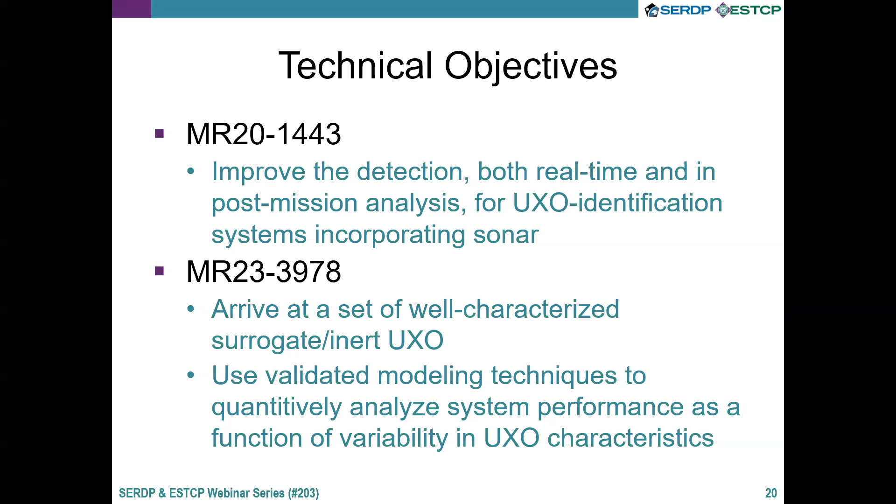And then the second project was a seed effort that kicked off last year, and this is number 3978, whose goal was to arrive at a very well-characterized set of surrogate inert UXO, and then ultimately work towards validating - using validated modeling techniques - to try to analyze how your system would perform as a function of variation in these UXO characteristics.

So both of these were very high level objectives. Both of these projects have several tasks and secondary research goals associated with them. For the focus of this webinar, I want to give you a high level view of how these complement each other.

Essentially the 1443 is going to take a macroscopic view of the key physics associated with the target, and is going to try to distill this complicated problem down to just a few key elements and come up with a way to incorporate these into a classification approach.

On the flip side, project number 3978 is going to actually drill down more microscopically. It's going to really dig into the UXO characteristics themselves and try to learn or make quantitative assessments on how these are going to affect classification.

It's important to have some context for what we're working on here. Both of these projects are aimed at the multi-sensor tow body system that was developed by the Applied Physics Laboratory, the MUST system. Both of these projects are aimed at transitioning knowledge, tools, and simulated data sets to aid in this system.

Just a high level view, it's a MacCartney Focus-3 towfish, and it has a couple of EdgeTech sensors on it. One is the 2205 dual frequency side-scan, and the other is the buried object scanning sonar, the eBOSS.

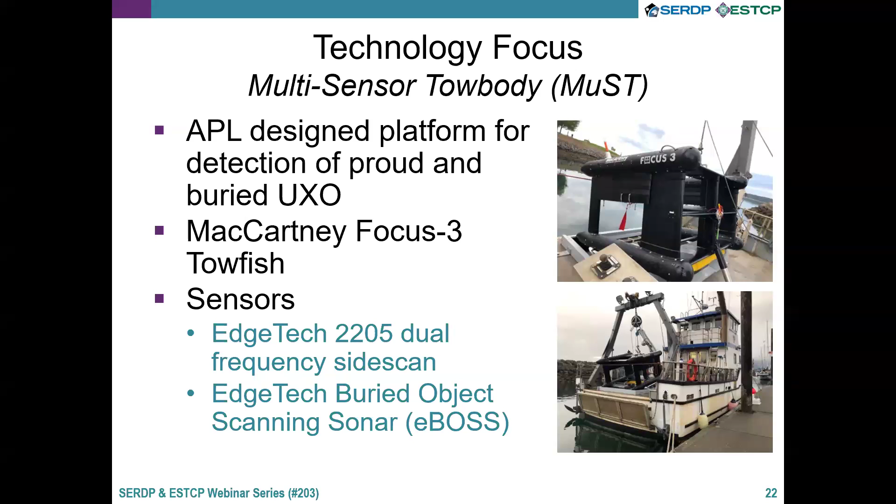There's a lot of information online in final reports and past webinars, but I still wanted to take a little bit of time to show you the example data products that come out of the MUST system.

The MUST system collects 3D volumetric data. Dr. Tim Marston has put a lot of work into developing eBOSS toolkits that give us a lot of flexibility in how we choose to view this data.

For the purposes of these projects, I am focused on looking at two-dimensional maximum intensity projections, so MIPs, of these data, but really I'm going to focus my effort on the acoustic color domain. This is an angle frequency representation of the data, so it really gets at those structural acoustic responses from these objects.

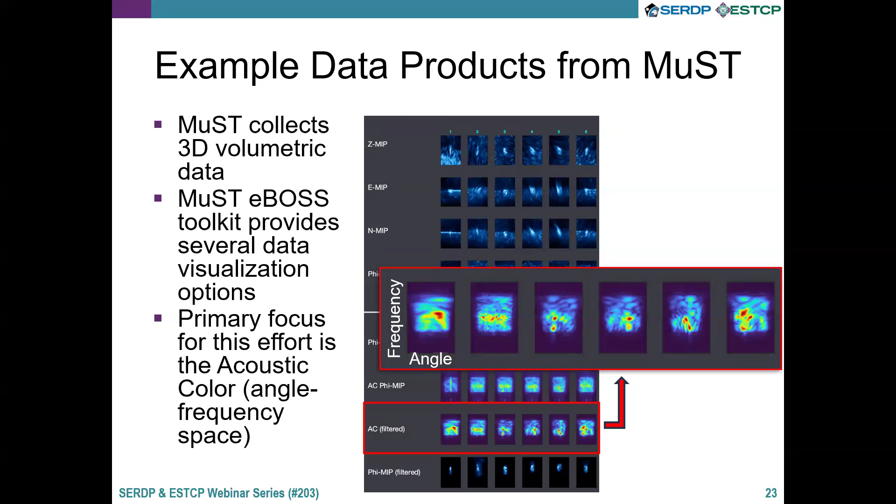As I mentioned, this is a very complicated problem. So when you start to say, okay, what are the key pieces of physics that we need to be thinking about and try to utilize, I wanted to set the stage for all the different categories that we're faced with.

We have variation in the UXO type. Within each class, you have variation in the features of the UXO. They can have different nose caps, they can have fins or no fins. The level of corrosion that they've experienced will affect all this. The presence of clutter can affect things, that could be man-made objects like crab traps, anchors, and scuba tanks, or it could be more natural clutter objects like boulders or coral heads.

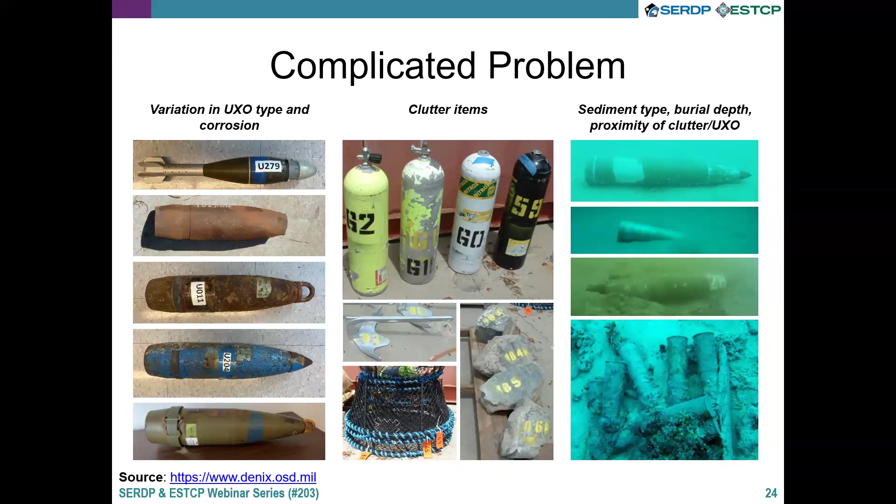And then finally, jumping into the environment side of things: what type of sediment, what's the bottom type that you're in, burial depth, are you close to these clutter items, or are the UXO deployed very closely in a pile of some sort? So all of these are going to make this problem very complicated.

Now, if we illustrate this with data, what I've done here is gone back through some old data sets from the MUST system when it was deployed at the test bed at Sequim Bay, which is operated by Pacific Northwest National Lab. This particular data comes from 2020 and 2021, two consecutive years.

And I'm showing three different 155 millimeter howitzers. Each of these howitzers is different. One has a missing end cap, one has a missing nose, one of them has a buckle and a lifting plug in it. So they each have slight variations.

Furthermore, I'm showing you data that spans different burial states. So if you focus on the third column of the third row of data, which is the acoustic color, and you transition from the left side of the screen to the right, you're moving from a proud scenario to a situation where your nose is slightly buried, to half buried, and then finally deep buried. This is just giving you a sense of the level of variation that you can see in actual data for the same class of objects.

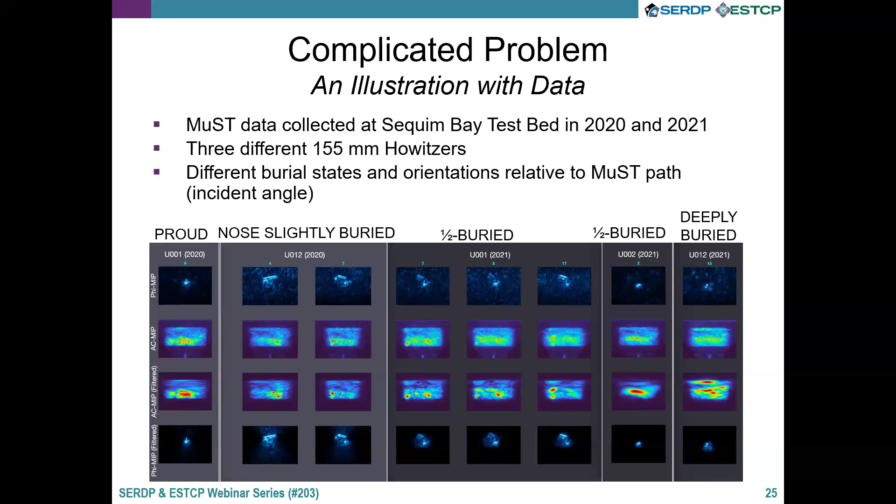So how did we set out to simplify this problem given all the factors that feed into this? We took it from the target side, and that is because our group at the Applied Physics Laboratory, we really know the target physics. So that's what we do best, and so we attacked that side of the problem.

Part 1 of this webinar is going to take you through these two projects that are really focusing on key ways to deal with the target side of the problem.

So how does sound interact with an elastic object? That's the picture on the left side.

In part 2 of this webinar, Dr. Kargl is going to up things a little bit. He's going to focus on how sound interacts with these objects within an actual environment, a simple environment. You'll see some of these diagrams on the right side that are similar in his talk in part 2 of the webinar.

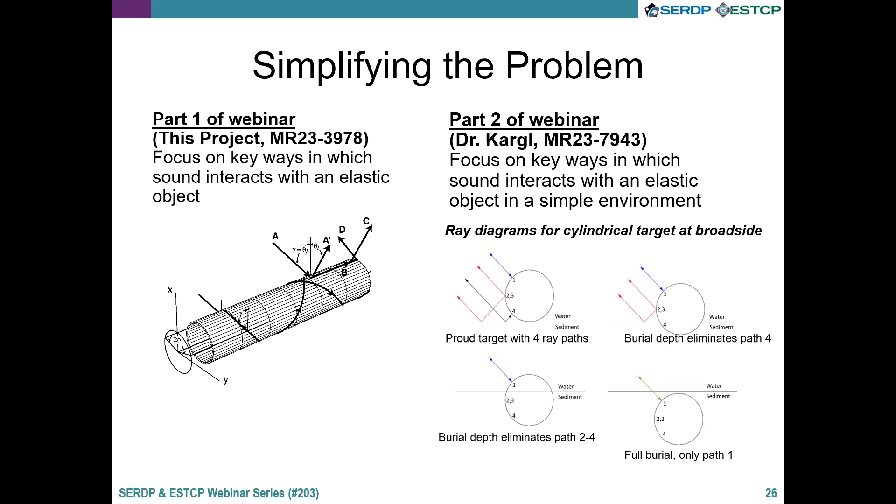When I set out to think about how do we simplify this problem, one of the dominant characteristics of these UXO is that most of them have a cylindrical body. They might have different nose caps and fins and whatnot, but ultimately their body, the shell of them, is cylindrical in nature. And the good thing that helps us is that there's been several decades of research into understanding how sound interacts with cylindrical objects.

I have an image on the right, and I'm not going to go into the details of all the angles associated with this. It was simply to illustrate that if you are able to insonify a cylindrical object, there are certain angles and frequencies for which the sound will couple on and will actually travel down it in kind of a surface-guided wave. It can actually produce significant enhancements to the scattering.

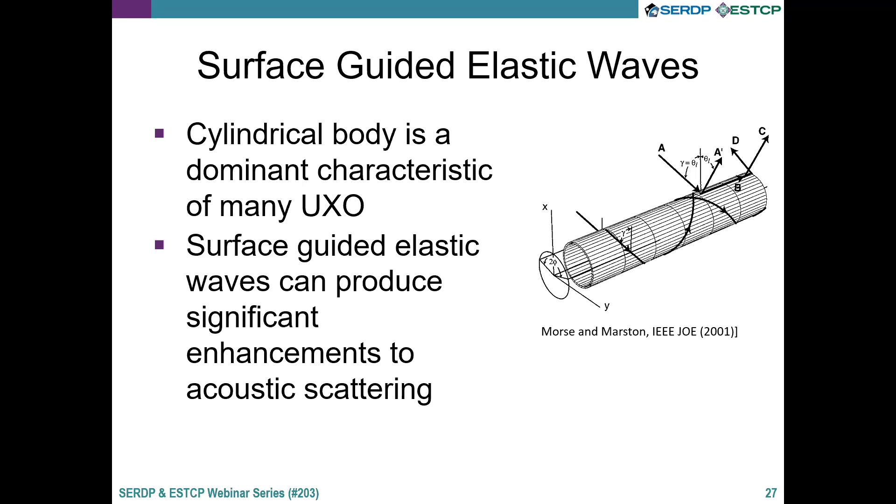Now, I said that we've kind of distilled this complicated problem down to simple things, but I still show an equation to say there's still some intense mathematics involved in doing even this kind of simple take on these problems, on these scattering problems.

So for the type of resonance that you want to look at and predict, you need to be able to derive the phase velocity of that particular resonance. That phase velocity is going to depend on shell thickness and the velocities of the actual shell material, whether it's how fast the sound is traveling through the steel material itself or the aluminum material or whatnot.

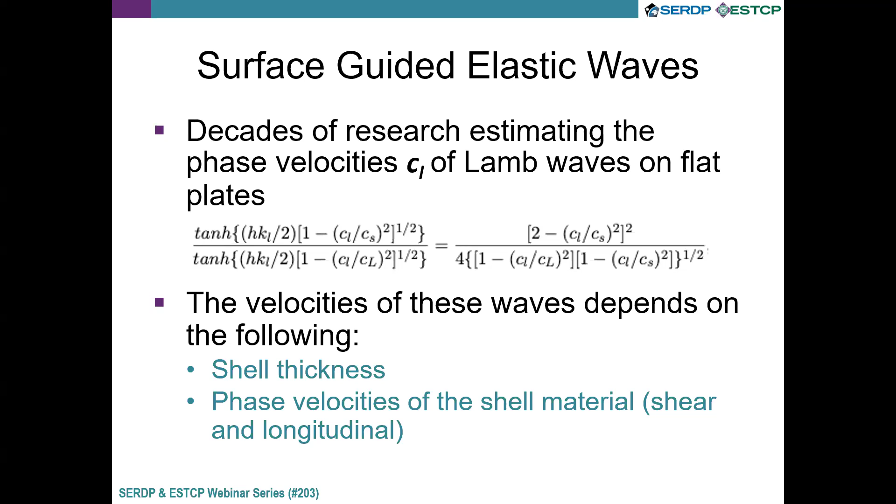Once you're able to derive those phase velocities, you can actually use that information to derive a set of coupling curves. These coupling curves are going to predict where the sound can couple into very specific resonance types in this frequency angle space.

With the help of Dr. Lane Owsley, what he was able to do was take these coupling curves that I'd been able to derive and build kind of these detectors, essentially these masks based on these coupling curves. The baseline detector was just a binary mask, and it would just integrate energy in a binary sense, shown in that left figure.

He has since created an updated detector that takes more of a continuous measure of degree of fit to the predicted resonance location. This is helpful because, again, we are deriving all of this just based on a simple cylindrical shell. These things actually have tapered noses, they've got fins and whatnot, so we need to account for the fact that there are basically error bars in what we're doing.

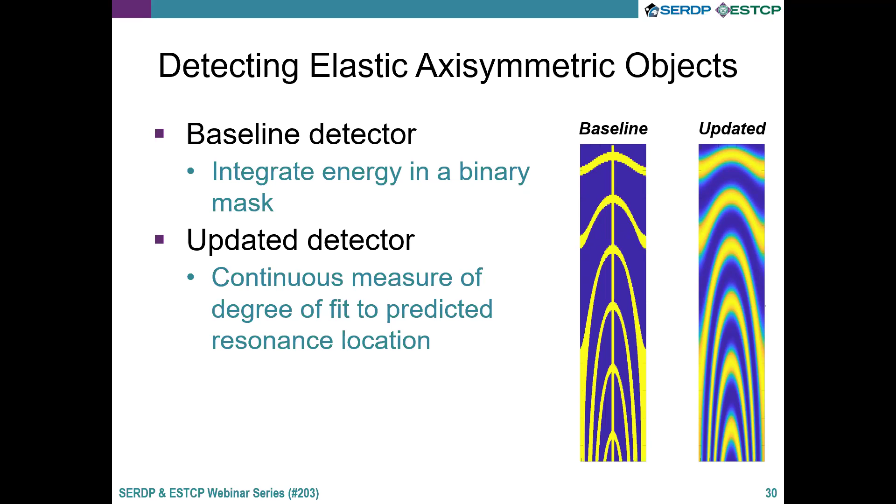We have focused on 3 wave types, so 3 resonance types. Those are shear modes, compressional modes, and antisymmetric Lamb waves. For the purposes of this, I'm not going into the details of what all of that means, but if you're wanting more information from the physics side, I encourage you to reach out to me offline, and we can dig into that a bit more.

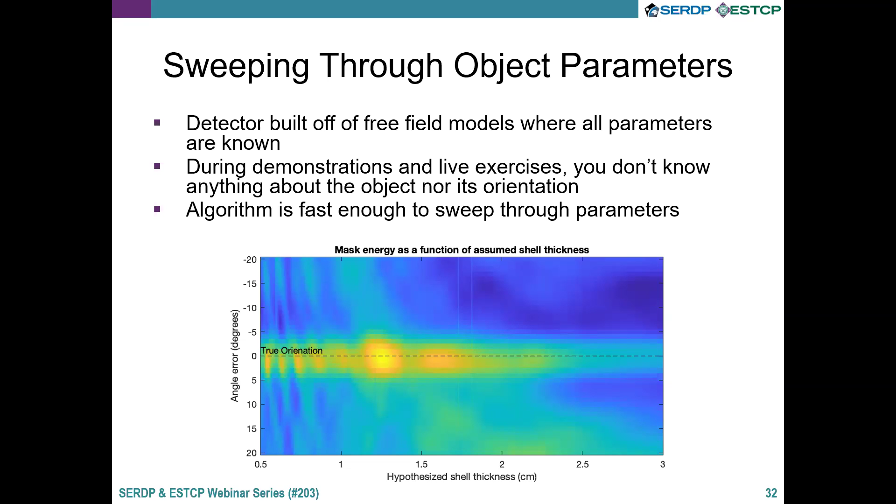So that gave you the macroscopic physics, getting down to simple parameters and how we'll utilize that physics to give us another piece of information in the classification problem. Now I'm going to flip over to the more microscopic view. Instead of just thinking about cylinders and modes of cylinders, we're going to build up some high fidelity target models and really try to characterize these objects well, then figure out what pieces of these munitions are important and the implications this has in a wider UXO remediation operation.

There were 9 UXO loaned to APL from PNNL. They fell within 5 classes. There was actually a 6th class, the 40 millimeter shells, but we focused our effort on the larger objects, spanning from 60 millimeters up to 155 howitzers. Within each of these classes there were a number of different variations—multiple types of munitions, different levels of corrosion. Some had holes in the side, some had noses, some had fins. So there was a wide variety.

Within each class, we would create up to 6 variations of models—one was just the body, one is the body with a nose cone, and so on. You can read that list of different variations. The full 3D versions of these were provided to Dr. Ahmad Abawi in support of his project 1275.

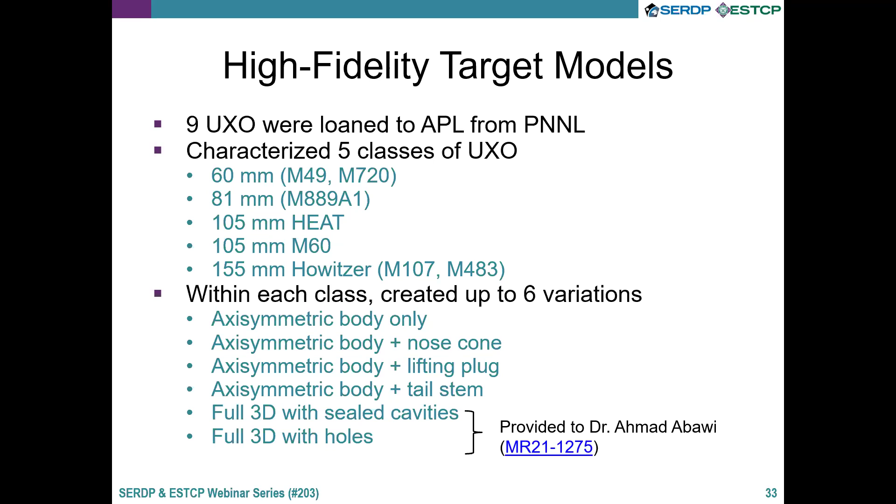Step one, you've got to characterize these things. So we looked into a number of different characterization techniques. First off, you're in the lab with calipers and whatnot, just measuring things.

We had an NDT thickness gauge to try to tease out material properties, but also shell thicknesses.

What's nice is University of Washington has an X-ray computer tomography CT scan facility, so we were able to send some of these big items that are sealed up—too rusted to get a view inside—and test out the capabilities of that facility. You can see that was able to get us an inside look at what the internals of this thing look like.

And then finally, literature research—lots of literature, looking through old military documents to understand even down to the manufacturing procedures, which would help inform what type of material was in use or available at the time.

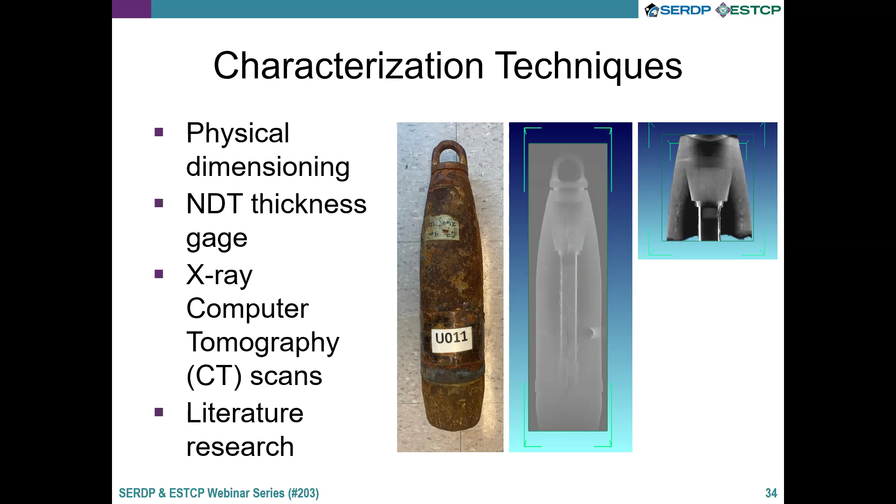So really digging into these different characterization techniques. Once you have all of that, you can now piece it all together and build up these high fidelity CAD models. On the left, I show an example of a simple object, which is just a howitzer with an open end. It's all one material.

And then we had a lot of challenging objects. For example, the 105 millimeter M60, that's the one that has internal components to it, like a burster well and a fuse cup. There were different nose types, a pointy nose, and the eye bolt lifting plug nose was challenging. But then the 105 heat was another one that was challenging, the fins in particular. Dealing with the fins was a challenging piece to that.

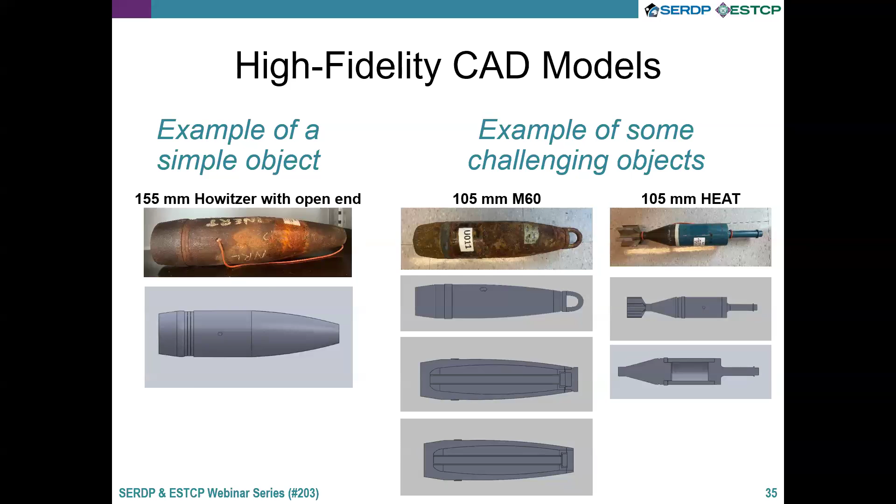The procedure that follows once you have these high fidelity CAD models is you then import these into a commercial finite element software, COMSOL Multiphysics. This was probably the step we were most naive on, in that the higher fidelity your CAD model is, the tougher it is when you import it and start trying to mesh things. All these fine details are very challenging, and there was a lot of learning that had to happen dealing with these really fine features.

That was a big new step we took on in this project. Once you succeed in meshing it, you run mesh convergence tests to convince yourself that you've meshed it properly and your acoustic scattering solution is converging. Then finally, the last two steps are really the computational burden: building up the bistatic scattering amplitudes, which are computed with our hybrid 2D, 3D FE propagation model. Then these amplitudes are converted to lookup tables for use in the TIER model, the target in the environment response model. These last two bullets will be covered in part 2 of this webinar by Dr. Kargl.

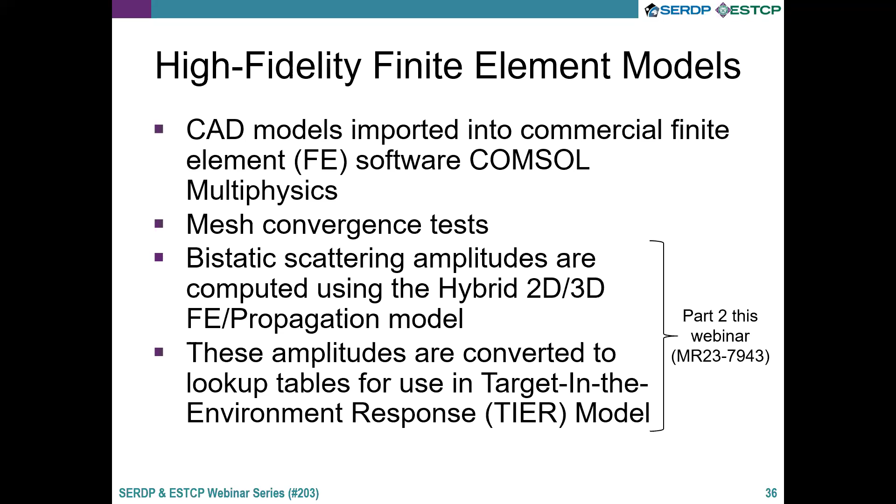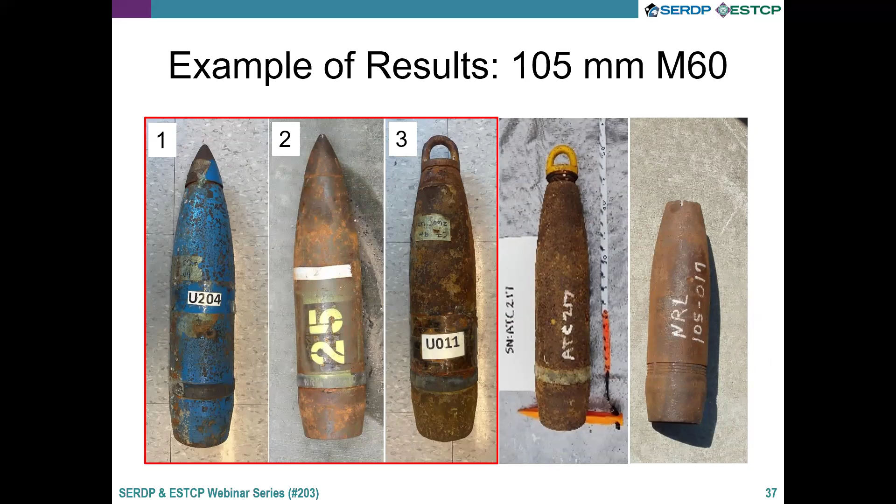I just want to show you a quick example of results for a 105 millimeter M60 shell. I show 3 different objects here—all 105s, but with slight variations. On the next screen, I show the mesh for these 3, so you can see the differences. Number 1 has the pointy end and all the internals, the burster well and the fuse cup. Number 2 has no internals and is an evacuated cavity. Number 3, we've now put a flat end cap on it.

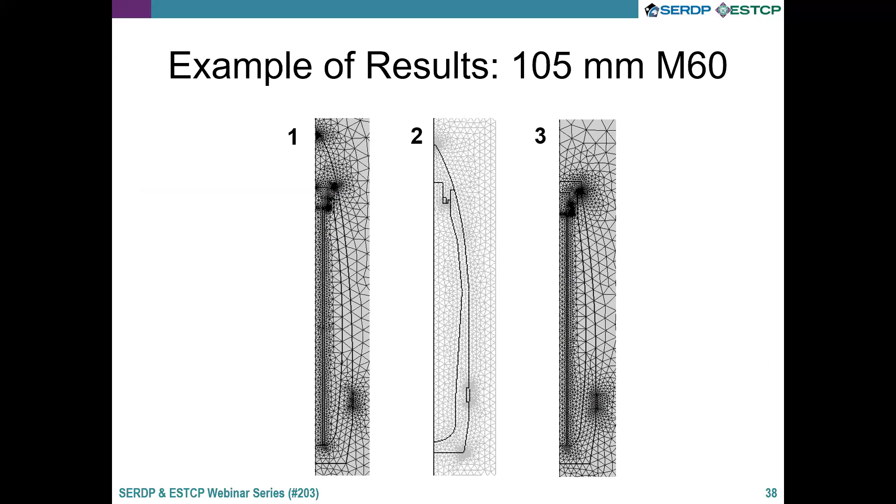Here's the results of just staring at the acoustic scattering from this. What was interesting, probably intuitive to us from a scattering perspective, is that the filler really makes a huge difference, more so than just the end cap type, and even whether or not there's a burster well. If this cavity has been flooded with water, it looks quite a bit different than if that munition is still intact and is just an air-filled cavity.

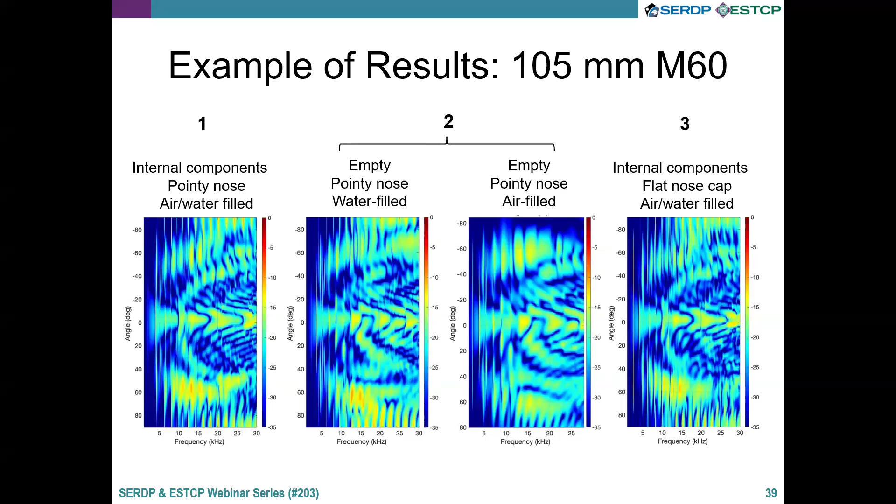Now we're at the stage where we're starting to try to quantify the effects of all these different target fidelity levels. The procedure we follow: we've built up the CAD models and FE models, generated the simulated data, and have different variations—defect models where we've got missing nose caps, missing tails, different types of noses and such. We're at the stage of trying to process this simulated data with the identical MUST processing chain to create identical data products that look as though they were collected by the MUST system.

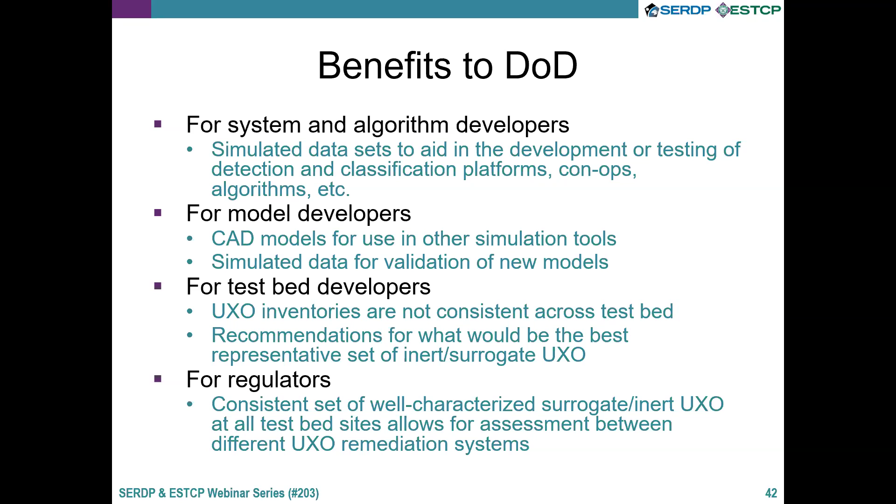For testbed developers, the UXO inventories historically were not necessarily consistent across the testbeds, and so we may be able to make recommendations as to what would be the best representative set of these inert surrogate UXOs. And for regulators, having a consistent set of well-characterized UXO at all testbed sites is going to open the door for assessment between different UXO remediation systems.

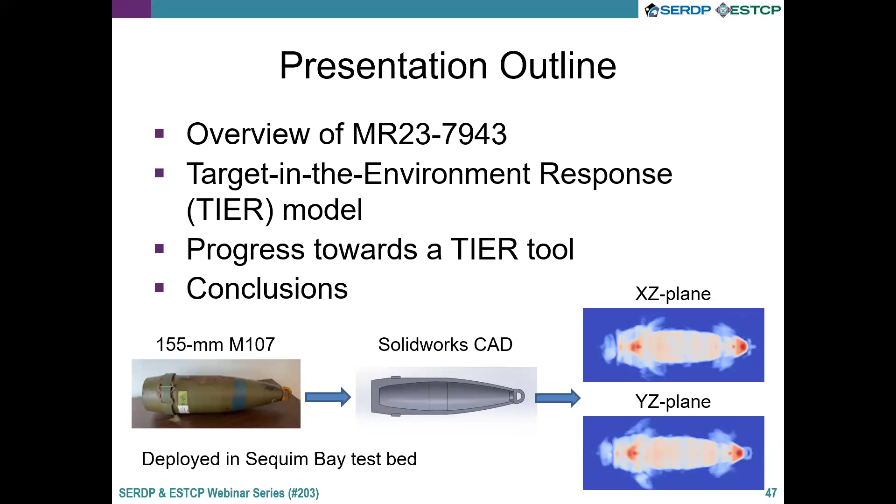So for a general overview, the TIER model, or I'll just refer to it as TIER, is a high fidelity acoustic scattering model. The problem with it is it is a research tool, and it's easy for someone not familiar with the internals to be led down the wrong path if they try to run simulations.

The second thing we have used the TIER model for is to assess specification for sonar platforms. MR 2545, led by Dan Brown at Penn State, he designed what he refers to as the sediment volume search sonar. This is a platform that's downward looking with about a 1 meter standoff to the sediment, searching for targets buried within a mud type environment. Working with Dan in his phase 1, we ran simulations on whether he could even see targets of interest at those standoff distances.

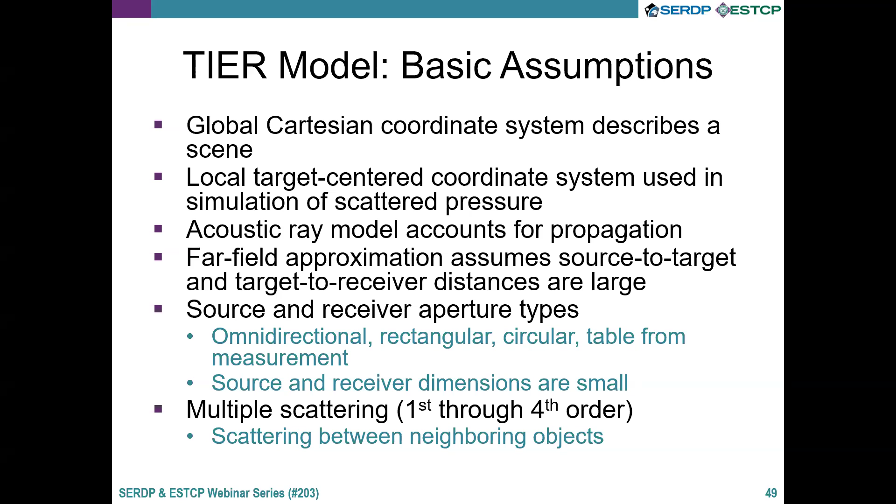The environments that TIER can currently handle is free field scattering. That would be no boundaries. It targets just in an infinite ocean, and you're trying to understand what is its elastic response. You then have the half space problem where you have a target sitting proud on the sea floor. You have a partial burial in the half space where the target begins to penetrate the sediment water interface. You have full burial where the sediment is assumed to be infinitely deep, or it's just a very deep layer.

You can also have a layered environment where you have a thin layer of, say, mud on top of a basement, where a target is actually completely buried within the mud layer, and you have to deal with that situation. It also allows for a homogeneous waveguide. This is where you can no longer ignore the air-water interface. Your sonar system interacts with that interface. And you can have an inhomogeneous waveguide. The difference between those two waveguides is that an inhomogeneous waveguide has a variation in the sound speed as you go down in depth.

The TIER model right now assumes that the sediment is either a viscous fluid or it can use what's called the effective density fluid model. The difference between these two models is the viscous fluid has a frequency independent attenuation factor, while the effective density fluid model actually has a frequency dependence to the attenuation. So higher frequency attenuates faster in the sediment.

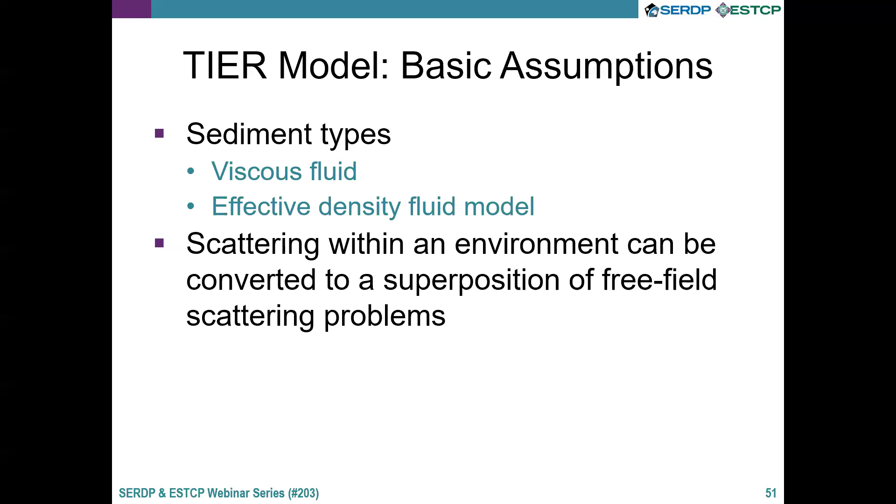The scattering within an environment can be converted to a superposition of scattering problems. This is done by considering a source and a receiver reflected through interfaces to give you image sources and image receivers. So I'm going to step through what that would mean for the half space problem.

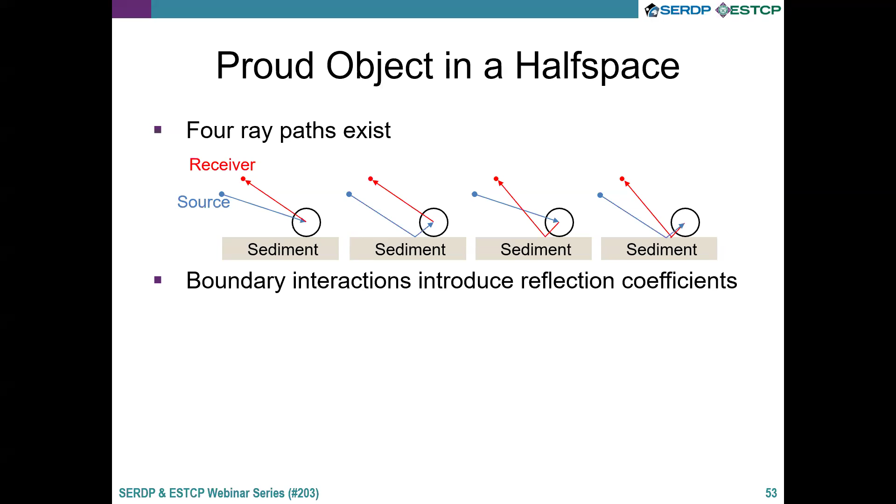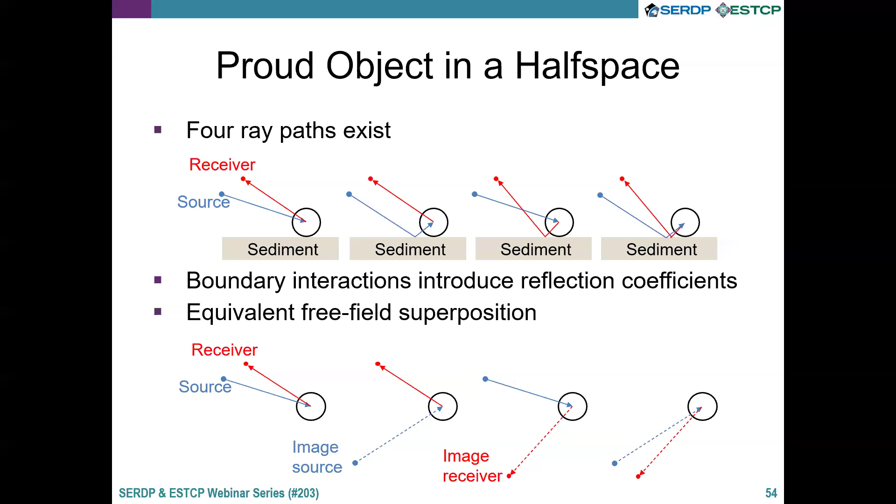So the targets that we currently handle in the TIER model: you can handle a point target, that's essentially a target that records the incident signal and just re-emits it. There are spherical targets, these are scientific targets that if you can't understand and model a sphere, which you can write down analytic equations for, then you have issues with whatever you're working on. Finite length cylinders are also an analytic model, and these are all targets that allow you to really assess a sonar system. We have 23 objects, these would be UXOs and other scientific targets that have monostatic scattering tables, that would be the source and receiver co-located.

These were some of the very first models that we created with the hybrid model that Aubrey talked about, and then I've used with the TIER model. We have 19 objects that have bistatic scattering amplitude tables that Aubrey mentioned.

I'll point out that we actually have information for 21 objects. Dr. Ahmad Abawi from Heat Light Sound in San Diego has provided me the scattering from some additional UXOs that he has computed, which we can't do here.

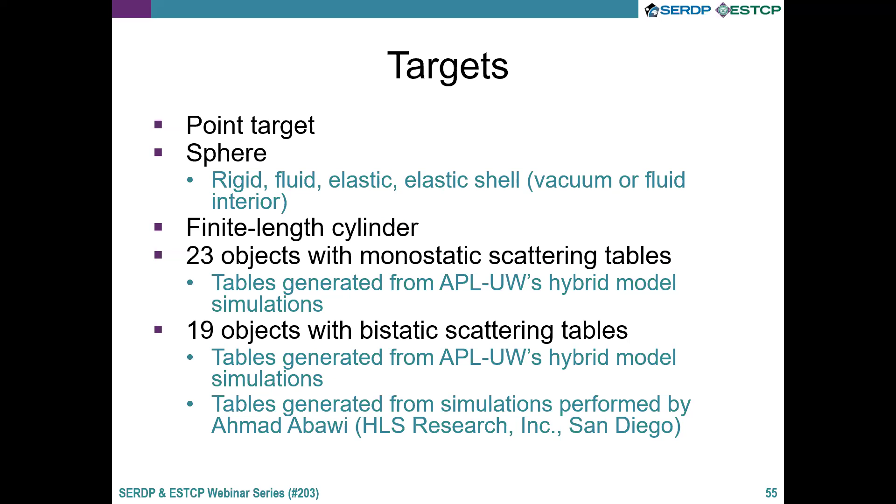I'm in the preparation of additional scattering amplitude tables. Aubrey showed examples of targets. All of the targets on that page, we have scattering amplitude tables for. That allows us to take one of these objects, place it anywhere in space, place our source and receiver anywhere in space, and compute the scattered field from that target. It could be on bottom, proud, buried in the bottom, or penetrating the bottom.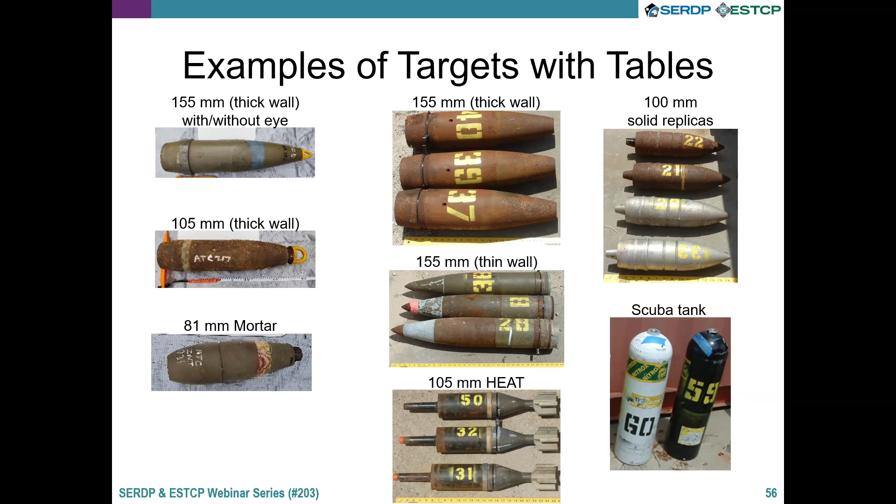We can handle this set of targets, as well as some additional ones. So the progress towards actually packaging the tier up into a tool that other people can use - I am a Unix person, so all of my tools are Unix utilities. These are command line utilities. They do not have a nice GUI interface. They just assume you can run them at a command line, and they read a simple input data file.

The top one, what I call tier, simulates scattered sonar signals. That's the one you would use if you're trying to assess a sonar system design, or trying to generate data to augment a data set, or trying to understand what is the behavior that you are actually observing in real data.

The next tool down, which I call PCB, just does a pulse compression and basebands the signal. That's a step in preparation of transforming sonar signals into a data product. The data product could be a SAS image, or it could be an acoustic color plot that Aubrey talked about, or you can use it to generate MIP files.

The TDI is a 2D time domain beamformer. It's an imager, it's brute force, and it's just meant for me to be able to image my data so I can see it, but I'm supplying it. Other people may want to use other types of SAS processing techniques on the data that can be generated.

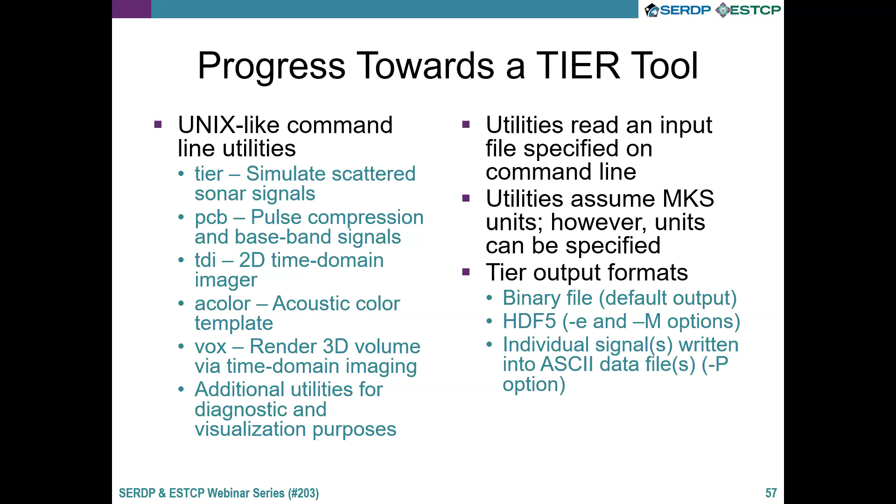As I said, the PCB utility consumes the tier model output files and produces binary files that the TDI, A-Color, and Vox programs use. Each of these utilities has an online manual, so if you forget something, you can look it up easily. The image here is just the very top part of about a 500-line online manual that says, hey, this is how you use this tool.

Each of these utilities also has a help message, and that's what's actually being displayed. The help message is a condensed version of the online manual that's embedded in the tool to jog your memory on how to use it.

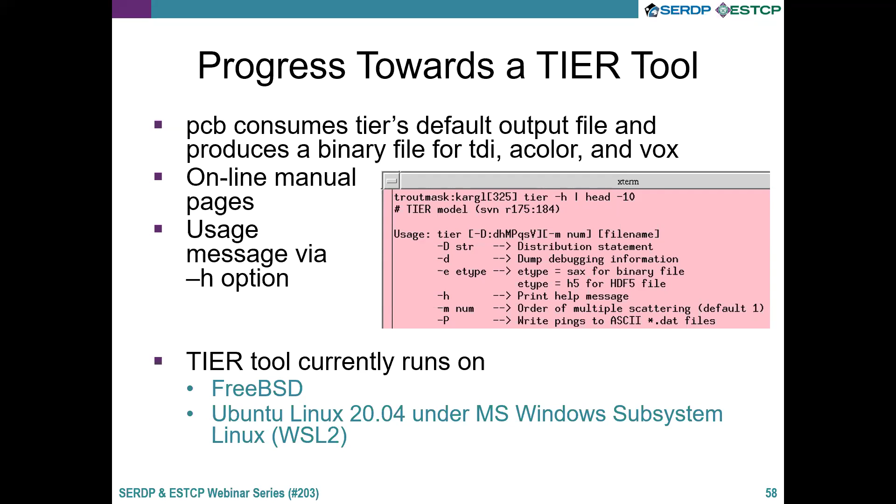The TIER tool currently works on FreeBSD, a Unix type system that I use. It's also been run on an Ubuntu Linux system, including one running under Microsoft's Windows Subsystem for Linux 2. So it can be run on a variety of operating systems.

To give you a feel for the tool, what you're seeing here is the bottom of the MUS, that's the yellow system. This round thing is a spherical source, and there's another spherical source on the other side of the MUS system. The long black item you see here is a receiving array with 64 elements, mounted on what's known as the Focus 3 tow body.

The tow body is shown below the sonar system, and you can see the size of this system in relation to a standard male figure. So it's roughly 6 feet in dimensions.

On the right-hand side, I was given data from Tim Marston from a Sequim Bay test bed for the inertial navigation unit for a transect through the test bed, transect 63. The two black lines in the curve on the right are the locus of points for the sources. I've projected the black lines onto the sediment interface, so you can see how the vehicle was towed through the system on the water sediment interface.

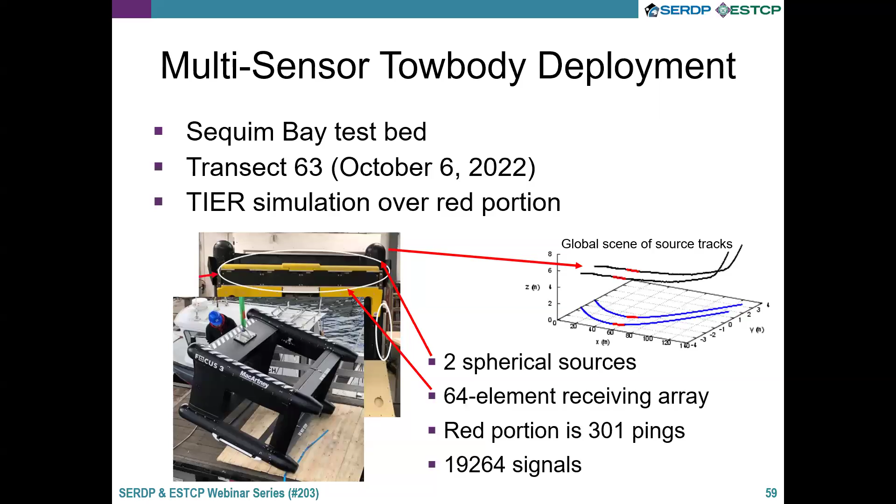So I did a simulation where I put a single object in 3 different locations and 3 different orientations. One object was right below the MUS track, one was about 5 meters to the port side of the system, and one at about 12 meters. That's about the entire range of what the MUS system has for a footprint on the seafloor when running at 5 meters above the seafloor.

To generate 19,264 signals for one target with 9 different orientations took about 2 CPU minutes on a standard desktop computer. The conversion using PCB took about 11 CPU seconds, and then the TDI program, the time domain imager, took about 1.6 CPU minutes to generate the images you're seeing on the right.

In this simulation, all these targets are buried in a sand sediment similar to what would be at Sequim Bay, where there's about 1 cm of sediment above each target.

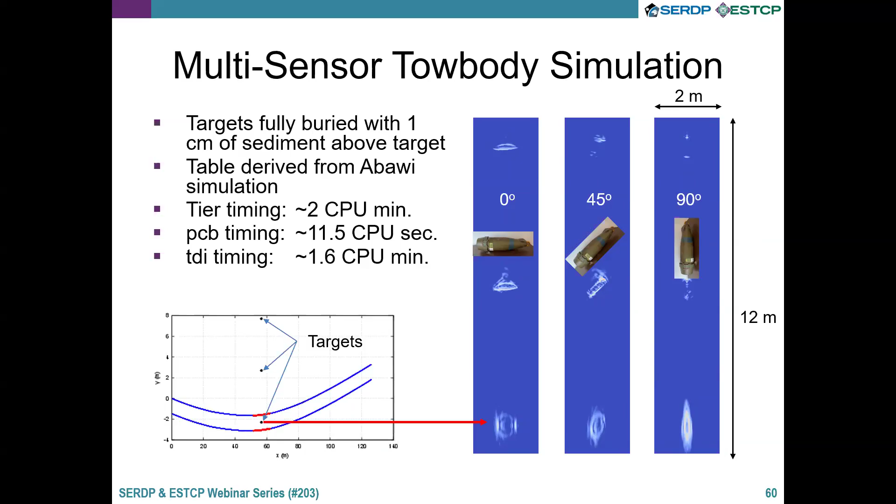So the conclusion at this point is the tool is ready for a preview distribution. The distribution method is via the APL web portal. For access, it would be either through permission from the program office where they ask me to give it to you, or you ping me and ask if you can get a version of the code, and then I would clear it with the program office that you have a need for access.

We just got the distribution method set up and functional. Sean Johnson at ARL Penn State is the first guinea pig, and he and I have been working on making sure he can get to the data and the tool and how he can use it. So a preview is ready.

There are a couple of caveats I need to mention. First, the table format for the bistatic scattering tables is currently undocumented, so a person wouldn't be able to generate their own table and consume it with TIER. I'm working on the documentation for how to generate a bistatic scattering table.

The comprehensive user manual is still under construction. I'm trying to describe both the physics models and the numerical limitations of those models, and how to use them all cohesively, so a user can use it without having to constantly ask me questions on how to do this.

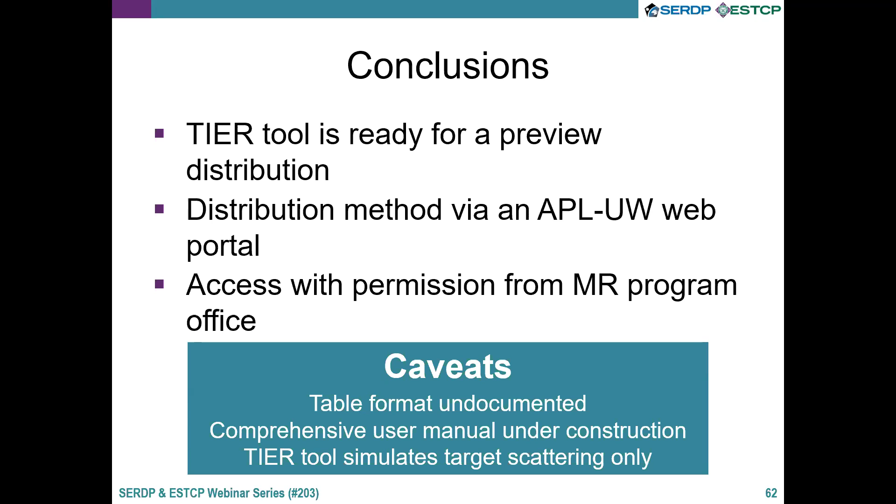So the benefits to the DoD: the first benefit is the tier tool can aid in sonar design decisions. We've already done that with both the MUS system and Dan Brown's SVSS system.

The tier model can do high fidelity simulations where you can augment available experimental data, or pre-train a classifier before you even go out, if you have some a priori notion that, oh, we have 155 millimeter targets that we're going after, or we have 105 millimeter targets in this environment, due to historic notes on what that range may have been used for.

And finally, tier can be used for post-mission analysis. You can address questions like, why didn't my system see a target? Or, we saw this target, but the physics doesn't make sense to us. What do we expect and what do we find?

Again, if there's any additional questions or you'd like access to the tool, you can ping me, or you can ping the program office and they'll redirect you to me, and then we can coordinate on how you can get your hands on the tool. And with that, I think I'm finished.